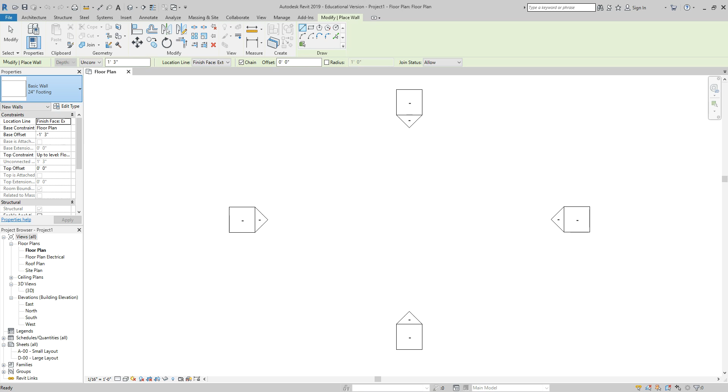The first thing I will be doing is creating a wall to put my doors in. Now, before I start it, I counted up how many doors I will need, so I make sure that I put enough in. So I'm going to start with a wall, and I am going to go to just a generic 4-inch wall. Start somewhere over here, and I'm going to draw myself about a 60-foot wall.

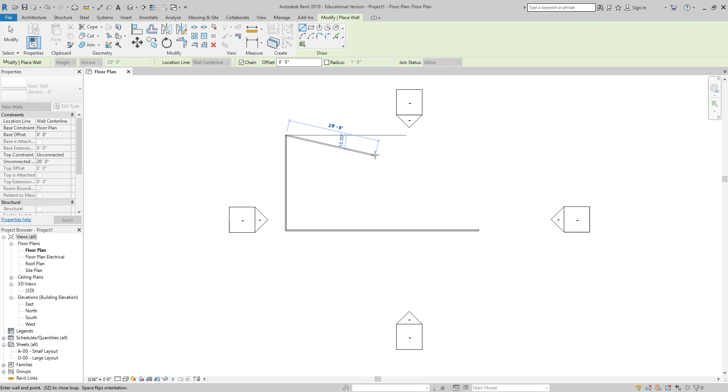I'm going to go up about 30 feet. This gives me 90 total feet of wall, which will be plenty. And I'm only going to draw an L. Why I do that will be more clear in a few minutes. I'm going to go ahead and select both walls. Make sure that their height is at 10 feet so it matches the rest of my stuff. Might have to change them separately, or you can change them ahead of time, like I should have done.

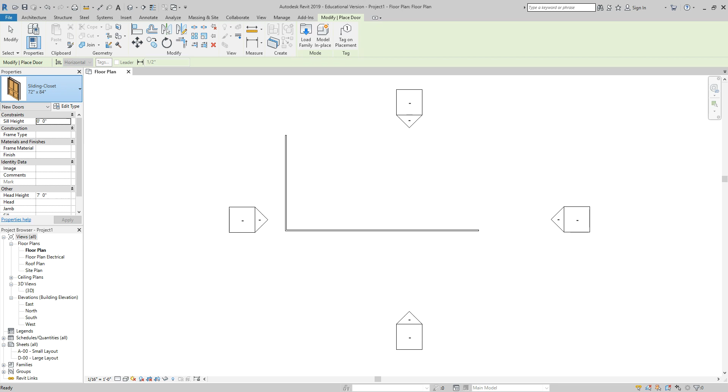The next thing I'm going to do is I'm going to go ahead and go to doors. Now, the first thing I want to do is drop down and pick one of the doors that I'm going to need. I am going to start with my regular single flush interior doors, and I used 30-inch by 84-inch doors in my project. I'm going to select those. Now, I'm going to go down the wall. I'm going to need a total of 14.

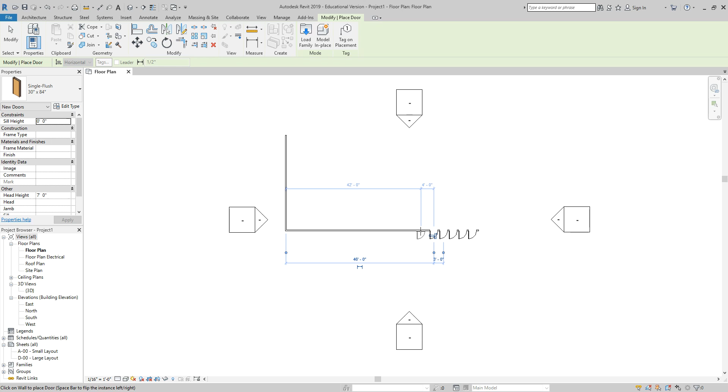So I'm going to start over here. 1, move down a little bit, 2, 3, 4, and so on. 5, 6, 7, 8, 9, 10, 11, 12, 13, and 14. I may have other types of doors.

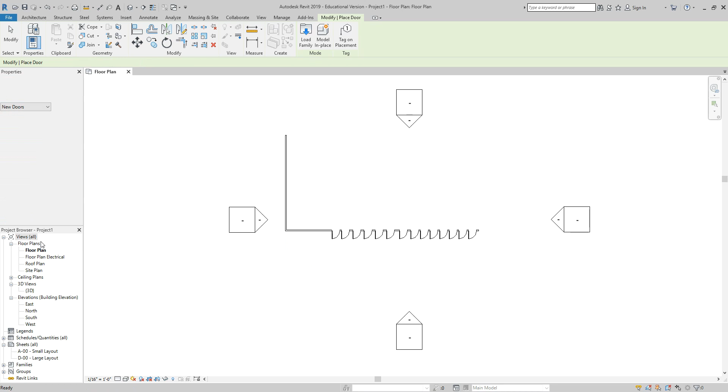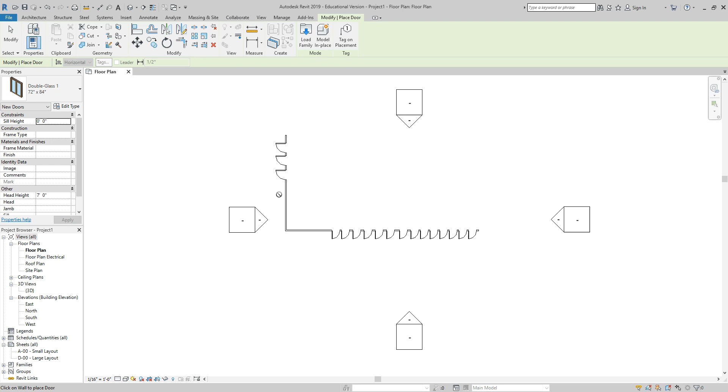For example, I know I'm going to need 3 36-inch doors. So I'm going to put those on those walls just so they're separated. I can tell the difference. The last thing I'm going to need is I'm going to need some double doors. I have these in my bathroom. I am going to need 2 French door sets. So I'm going to put one right here and one right here. I could put them closer together, but I have the space.

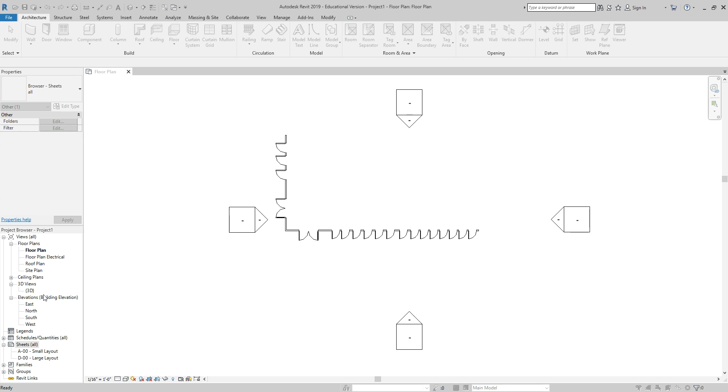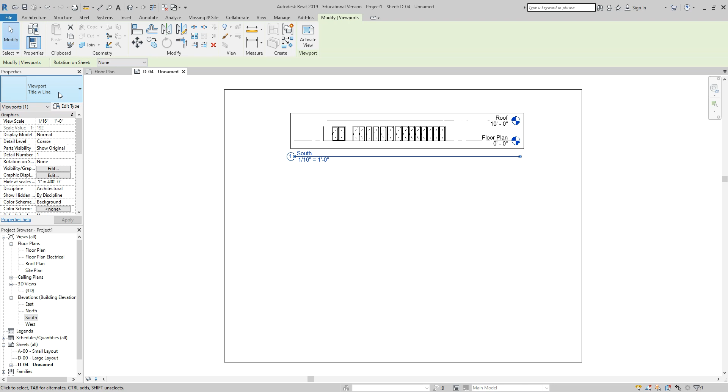Now, this view does me absolutely no good. The views that I'm going to need to use are actually my elevations. So what I will do is I will go down to Sheets, New Sheet, Blank, A-sized paper, and start one of those. I'm now going to bring in my south elevation. I am going to make sure I have no title. I am also going to hide in view. Sorry, I do have to open up each of these and make sure I hide my lines.

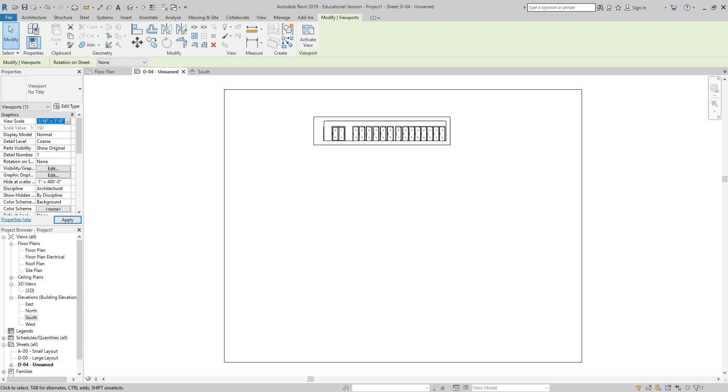I'm also going to size this because it has to be the same scale as my model, which is at 1/8 of an inch to a foot. Now, because I am going to need to glue one of these on each side of the wall, so one on one side, one on the other, I'm also going to bring in, since it won't let me make 2 south elevations, I'm going to bring in a north elevation.

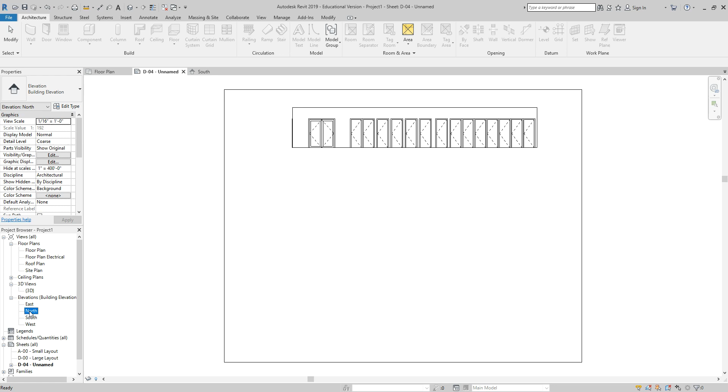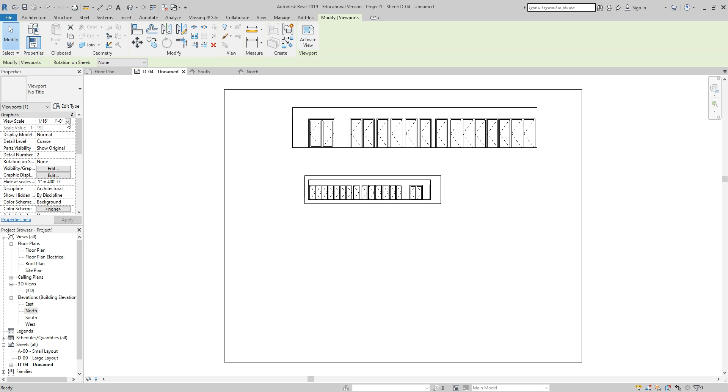So I am going to have to double click it, hide the lines by category, go back here, drag my north view in, place it, no title, 1/8 inch to a foot, and lay it out. I'm going to put these two together. That way I know what's what.

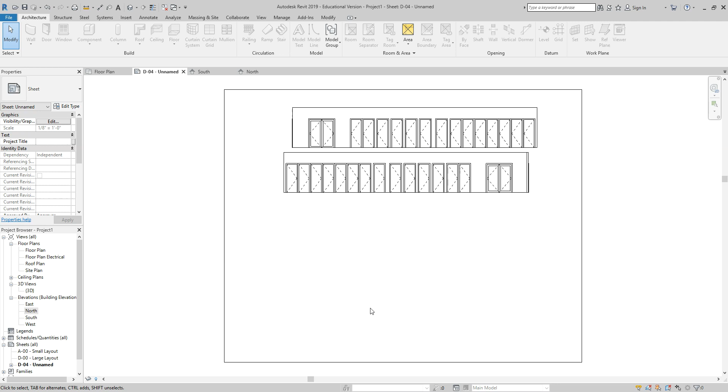I will do the same thing with my east and west elevations to put them on this page. Then I will be able to print it out, and this will give me 2 doors for every one that I need for my model that I will be able to use going forward. I can then cut these doors out so they are ready to go.